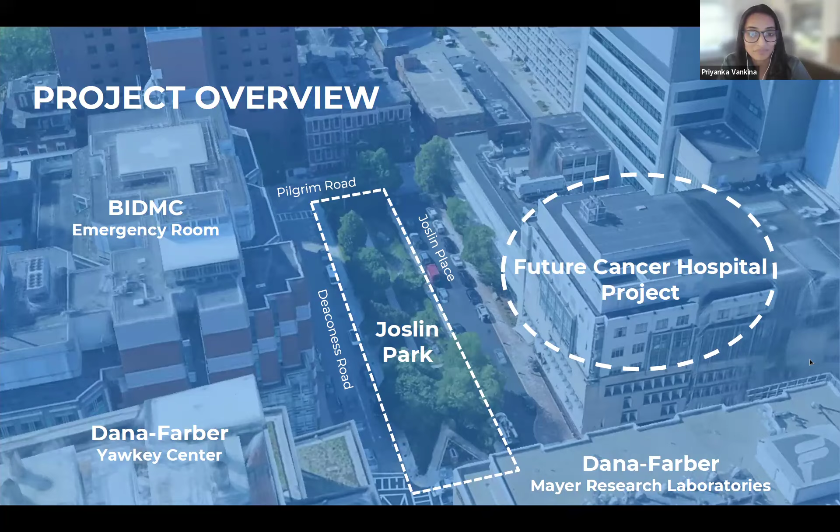Now we're done with the housekeeping, and we're going to get started on the project overview. We'll start with an introduction of the project team, then look at an overview of the project, including the schedule. MVVA will then speak about the final concept plan for Joslin Park and its impacts on existing trees. The presentation will be followed by a listening and discussion session where we invite you to share your feedback, and then we'll discuss next steps.

Once again, I'm Priyanka Vankina, the project manager from Boston Parks. Tonight we have Jill Zick, the chief landscape architect at Boston Parks. Also on the team is Seth Reisman, deputy director of design review from Boston Planning. The designer and landscape architect for this project is Michael Van Valkenburgh Associates. From MVVA, we have Chris and John tonight, who will be presenting the team's design work. Megan Bonner is your neighborhood contact from the Office of Neighborhood Services, and you are also welcome to reach out to her with any comments or questions. Finally, we have Michael McMillan, Parks Outreach Coordinator, who will be moderating the meeting tonight.

With that, I'll pass it on to Jill to discuss the project schedule and funding. Thanks, Priyanka. I'm Jill Zick, the interim chief landscape architect for the Boston Parks and Recreation Department. This is the 4th community meeting held for the Joslin Park project. The project has already completed 3 design meetings, and tonight we'll discuss the impacts of the final concept design on the existing park trees. For those of you who might be new to the project, I want to provide some further context on how we came to be here tonight.

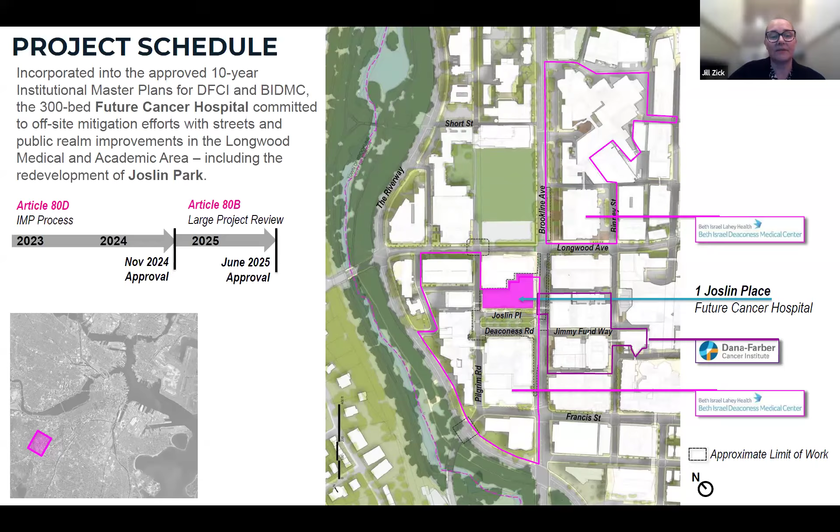The proposed development of the future cancer hospital on Joslin Place has presented us with a unique opportunity to renovate Joslin Park. There have been some interesting park issues that have come up through this lengthy design process, several of which we continue to explore to ensure the best possible park outcomes.

It's very unusual for us to begin a design process in one year and talk about constructing it five years later, which is what you're seeing suggested in this timeline. But the timing of the park design is tied to the advancement of the hospital project, so it is important for us to gather and incorporate timely community input as a part of the overall process.

Tonight's conversation will continue to inform the evolving design of the park, but the improvements will not be completed until about 2030, towards the end of the hospital's construction. It is also important to note that funding for the park improvement is coming from the Future Cancer Hospital project and not from the City of Boston Capital Improvement Fund.

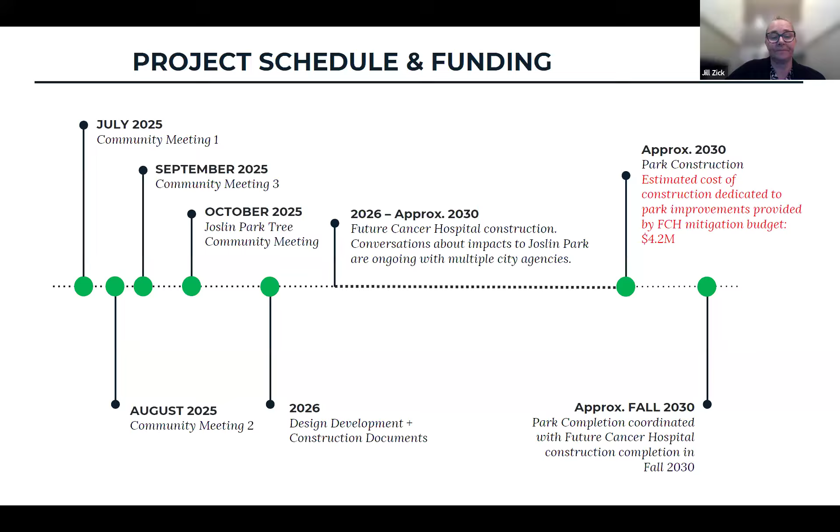Thank you, Jill. Thank you, Priyanka. Hi everyone, I'm Chris Donahue, principal at MVVA, the landscape architect, looking at this project as it relates to the Future Cancer Hospital. But really excited to be digging into Joslin Park proper, and what it means to look at the park and what could be a really fantastic public space for Boston, for the Longwood medical area.

We look at every project really as the first step is looking at the existing conditions. How can the existing context, the existing urban fabric, and the existing tree canopy support a new, accessible, inclusive, beautiful public space within the city? So looking today at opportunities to capitalize on existing tree canopy within Joslin Park and ways to reinvent the park, reinvigorate the vision for it around existing canopy, looking at several opportunities to do so with your input.

We began this process through some analyses that we presented as part of that public process that Jill spoke to a bit. Part of that analysis occurred in partnership with a licensed arborist in Massachusetts who went out and performed a catalog of the existing trees. They documented the species, the size, the form, condition, any notable structural risk, things that needed to be maintained or trees to be removed, things like that.

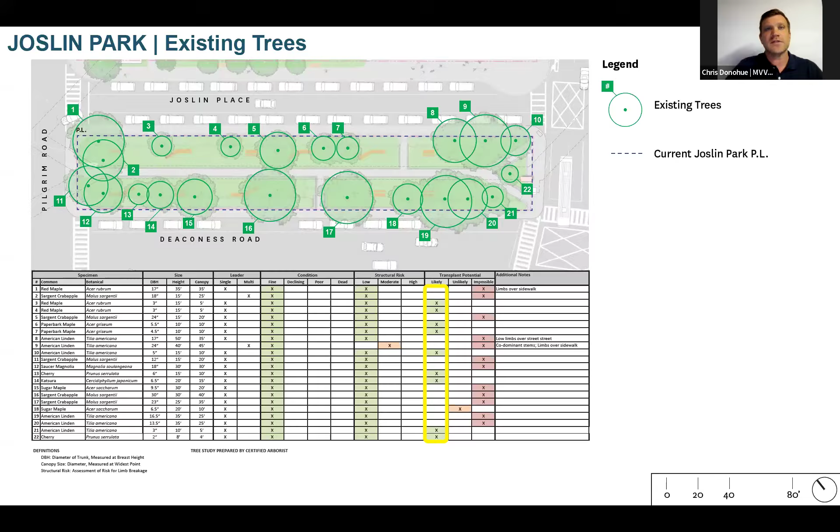And also whether any of those trees would be likely candidates for transplant, meaning could we take that tree out of the ground, move it to a new location, and would it likely survive? Of the 22 trees on site, they identified 9 trees as candidates for transplant. Those are shown here in yellow on this plan.

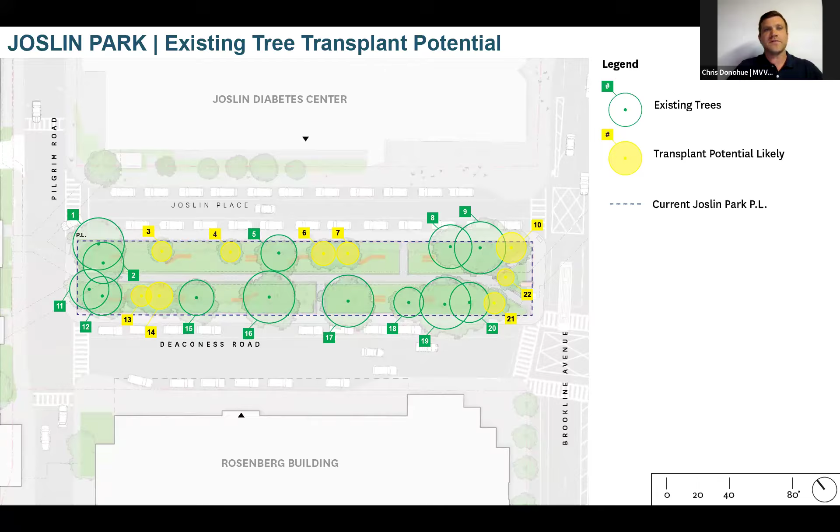All of them tend to be candidates because they're still of a smaller size, meaning they have a smaller root mass. It's more manageable to get in there with a large spade and dig those out as one contiguous root mass. That's the important part of moving a tree. There's lots of important parts, actually, but the most critical aspect is maintaining that soil mass, that root mass at the base of the tree, because that's really where trees get all of their nutrients from, is that root mass in the ground. Protecting that is an extremely important piece of the possibility for transplant. So the smaller they are, the more likely they are to transplant successfully.

Again, as Jill mentioned, we've been in a unique opportunity with this project. It's tied to mitigation, but it feels like such an incredible opportunity, right? To rethink the public realm as part of a new cancer hospital that's so desperately needed in the city. How can the public realm around it also support health and wellness of the city's residents? A vision for a park, as we've been encouraged to study with BPDA, with the Parks Department, and various city agencies, that makes for a more inclusive, accessible, verdant public realm is really exciting to me, selfishly, as a landscape architect, but also as a team looking at how this cancer hospital and the adjacent public realm can support a healthier city in the LMA and in the city more broadly.

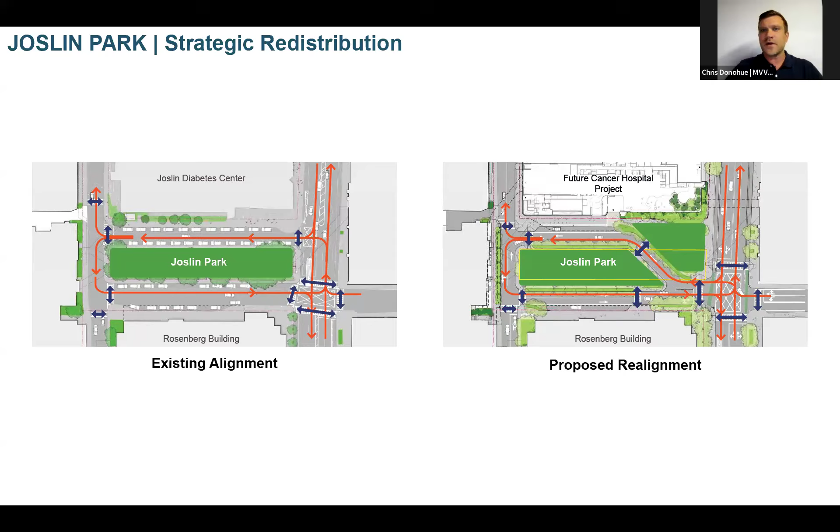I mention this because it's a really important part of how we think about protecting existing trees. This is a massive undertaking to realign the roadways, to realign the park boundaries, to establish new grades and establish new accessible routes through and to a park. It's a lot of work and a lot of disturbance. As I just said, disturbance around existing root mass is what causes potential failure if you were to try to keep a tree in place, but you weren't really careful around its existing roots. I mention this because it's highlighting the complexity in some of this and why we're making some of the decisions that we are, and looking into the opportunities that we are with this process that I wanted to look at tonight with you all.

The concept plan that we developed through that public process with the Parks Department and the community and BPDA and various city agencies is one of several garden rooms that negotiates quite a lot of grade change across a relatively small space. The space is about as long as a football field, so 100 yards or 300 feet, give or take, but it's about a third as wide.

If any of you were on previous meetings, you would have seen a diagram that we showed with the proportions and scale of this site. It's trying to get, across 10 feet of vertical change from the left side of the plan over here, down almost 10 feet lower on the right side along Brookline Ave.

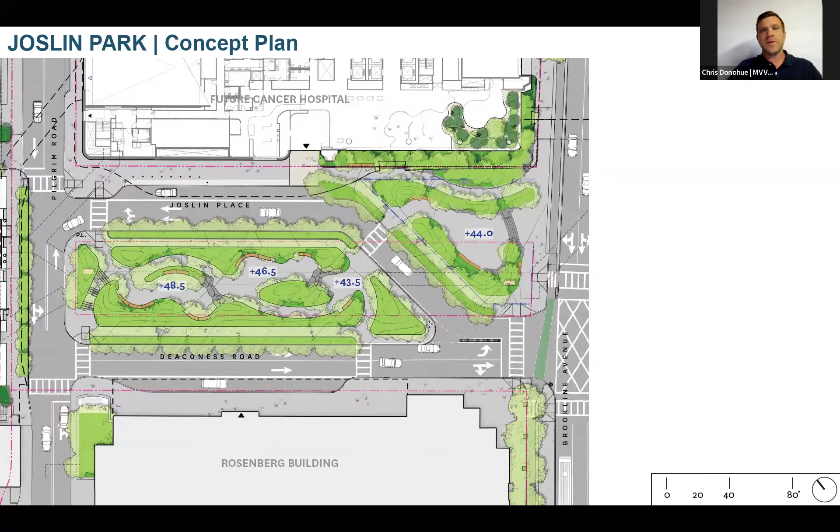And then between Joslin Place and Deaconess Road, it's also negotiating somewhere between 4.5 and 2.5 feet, from one side of the plan to the other. All of that's really important to consider when thinking about moving trees around or trying to maintain trees in their current situation, but moving a lot of the pieces of the park around them.

So we went through this initial exercise of mapping existing trees over that concept plan that we developed, and developed a list of, basically, trees to eliminate. Honestly, it was our first step of looking at what trees are simply not candidates for survival or for retention within this totally reorganized urban realm.

We looked specifically at the City of Boston's Critical Root Zone, or CRZ, which is defined as a 12-inch radius for each 1 inch of diameter in the tree at DBH, or diameter at breast height, 4.5 feet off the ground. So, for example, a 9-inch diameter tree will have a 9-foot radius critical root zone, or 18-foot diameter.

So these circles, these sort of pinkish-purplish circles—this is a very colorful diagram, I apologize to anyone with difficulty with color—those pink circles represent the critical root zone. And so we went through and started to analyze critical root zones that are simply too large, marked in orange.

That's tree number 5, 16, and 17. Their critical root zones are extremely broad, capture almost the entire site, and would make it almost impossible to weave in new accessible pathways, new accessible garden rooms, new benches—anything new, really, would be very difficult to accomplish within their critical root zone. So they become very difficult to maintain, if not impossible.

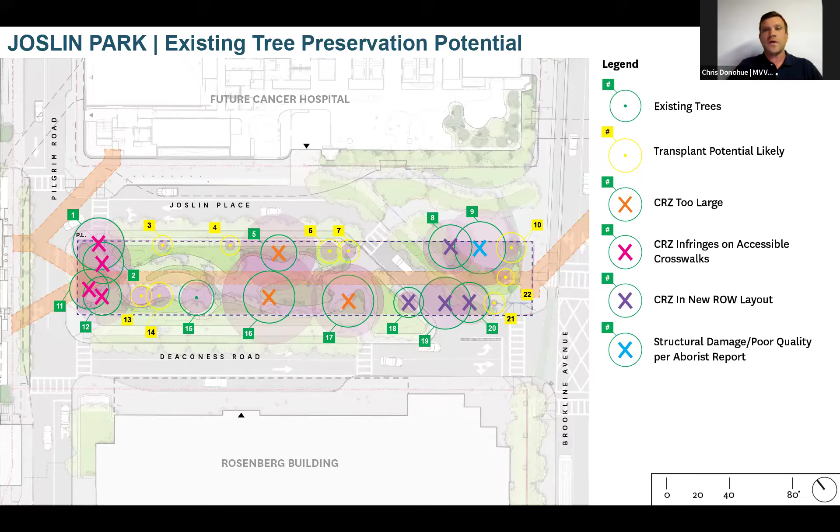Take a deep breath there for a second.

The other thing I wanted to acknowledge here with our process and this park—extremely narrow space, as I said, but quite complex as far as an urban park goes. And part of it is because of how narrow it is. As I said, it's negotiating nearly 10 feet of grade change. You can't really change much about the existing topography under a tree that's been in place for any given amount of time, so basically all the contours under an existing tree would need to remain as is.

Worth noting, this in orange is an existing below-grade tunnel that we've spoken about previously. There will have to be some repairs to that tunnel, some moving of existing utilities along the top of that tunnel, to support this new park alignment. All of this is part of that mitigation package. And then just noting the sort of mess of existing utilities.

This is very common in cities like Boston. There's quite a lot of complexity in the existing utility networks, especially true in a medical community where there's a lot of demand for different resources in these very complex buildings. There's a lot of existing complexity within a small site that informs how we think about what can be preserved, and where there are opportunities for relocation versus preservation. It's not just simply designing around trees in an open field, but it's something we're seriously embarking on as the next phase of design as we develop the vision for the park.

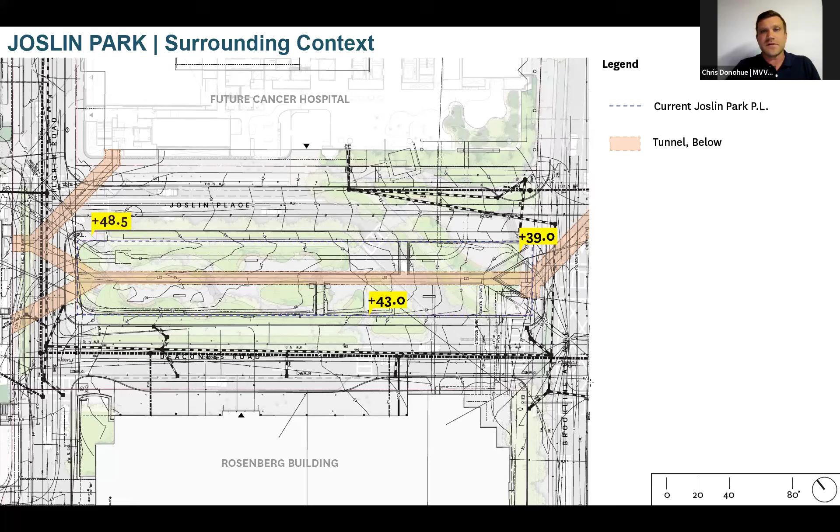We've identified several opportunities that may work well together as more than one, but we've pulled them out to look at separately given the different issues or complexities that come with them.

Opportunity A: tree number 15 is a 9.5-inch DBH sugar maple. It's the largest tree by DBH standard still deemed possible to salvage based on the diagram shown earlier. It's also a qualitative choice—myself and others on our team at MVVA, having been on site together quite a lot, all noticed this tree and thought it would be a really good candidate to save, given the quality of the specimen and the canopy it provides in the city. So we're looking seriously at how to reorganize the plan to allow that tree to remain in place.

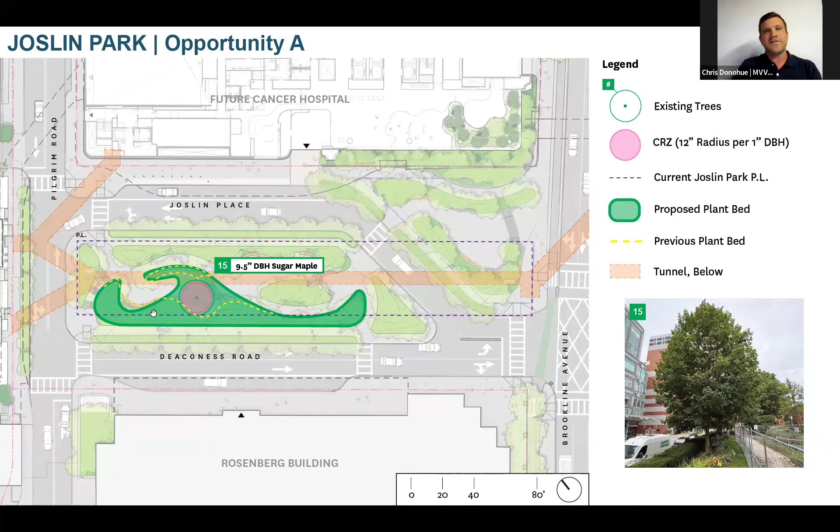This diagram shows where that tree sits in the final vision we developed through the concept design process. We're now looking at how to modify that vision to retain these trees. In that same location, we'd have to maintain a plant bed around it rather than the paved garden room we were suggesting there. This dark green shape shows how that plant bed might be reorganized to absorb the critical root zone of the tree so it could remain at its current elevation in its current spot. We would deconstruct areas of the park around it and rebuild a new park around that tree so it remains in place.

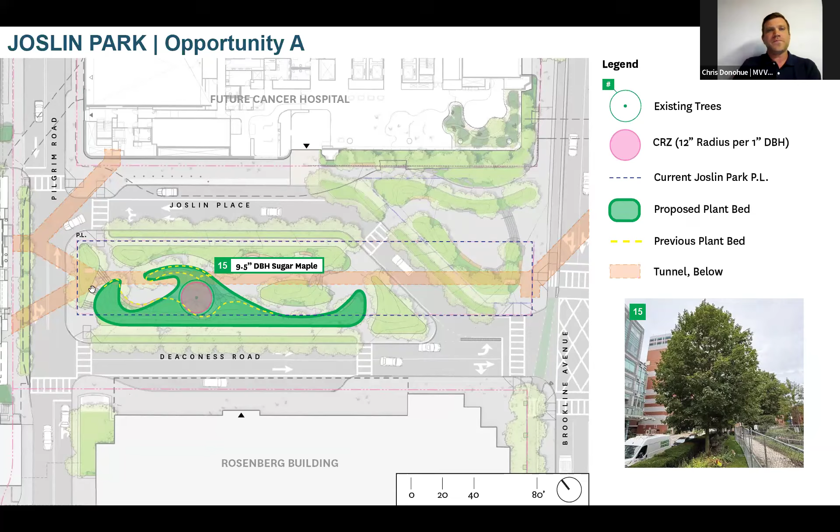The net change there is approximately 750 square feet of modification to that final vision plan. That change can be read as a net add in planting area—an additional 750 square feet of soft area within the park, which we think of as tree canopy, shrubs, perennials, things that are soft and beautiful on the ground plane.

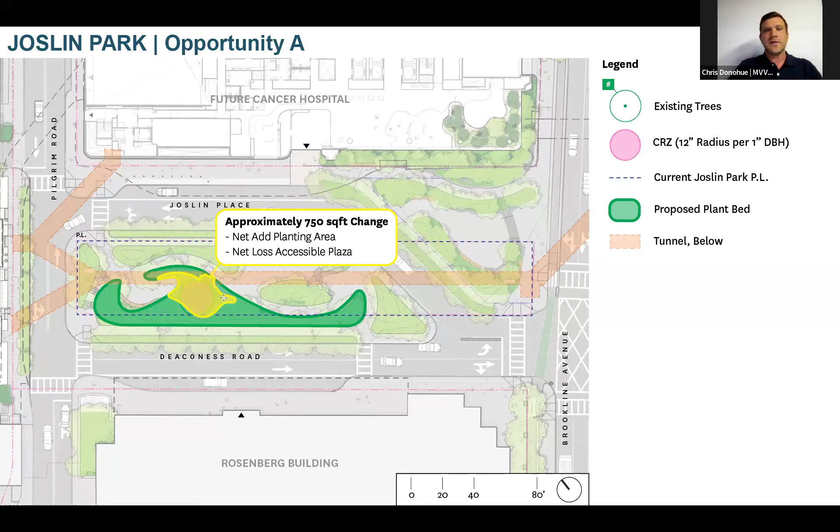But the really key charge here is making a more verdant public space, while also making one that's much more accessible and inclusive, allowing for gatherings and people of all walks of life to come together in a place that offers respite in the city. So there is a bit of a loss in net accessible plaza space compared to what was shown previously, if we maintain this tree. That doesn't discount it as an opportunity, but we're trying to track where we were previously, because it is a public process—we want everyone on board with the decisions we're making collectively.

Opportunity B looks at it from a different perspective: how we might capitalize on the opportunity to transplant trees—those smaller ones we showed in yellow. The nice thing about this idea is that it starts to create the vision for the park that we eventually want to see in 2030.

This park currently has a line of trees on either side. We envision it more as a miniature forest, or pockets and corridors of miniature forests—patches with quite a lot of transparency, so you can see through and underneath them, but they provide a really robust and diverse urban canopy. It's a mix of different species clumped closely together, creating garden rooms and nice density, places for migratory birds to land, adding an entirely new quality to a public space in the city.

So the idea was taking those, I think there were 9 trees identified as candidates for transplants, taking 4 or 5 of them and lumping them together to start that idea of a miniature forest as a sign of what's to come when this park is realized. That's another really exciting opportunity we're looking at folding in. In this example of these 5 particular trees we identified, it saves a total of 18 inches DBH amongst those 5 trees.

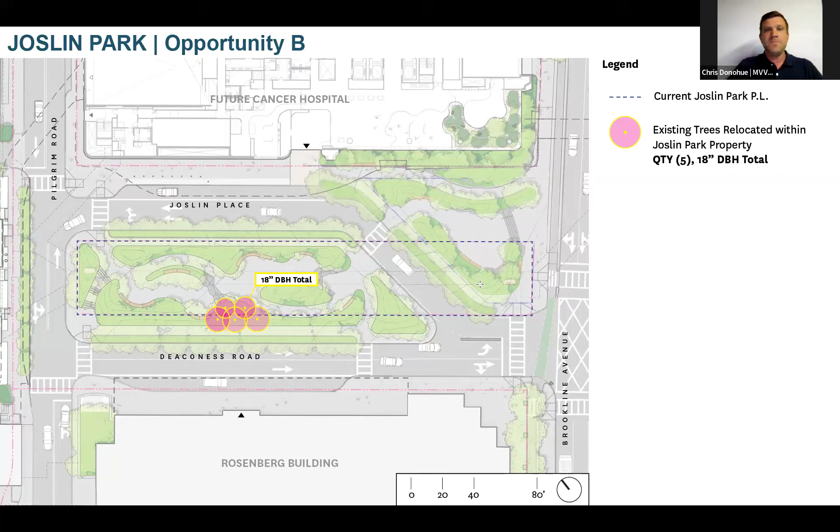So that's nearly double what that one existing sugar maple would save if we were to retain it in place. I think it's also really great to maintain that much canopy, even though it's moved from somewhere else on site, still within the boundary of that same park and used to those same general conditions.

And then opportunity C goes back to a concept that maintains trees in their existing locations. Tree number 13 is a 6-inch DBH cherry tree, and tree number 14 is a 6.5-inch DBH Katsura. Katsuras happen to be one of my favorites, so I'd love to see that tree or other versions of it in the park—they have really beautiful structure and bark, and unique leaves too. We use lots of them as multi-stems in other landscapes of ours here in Boston and around.

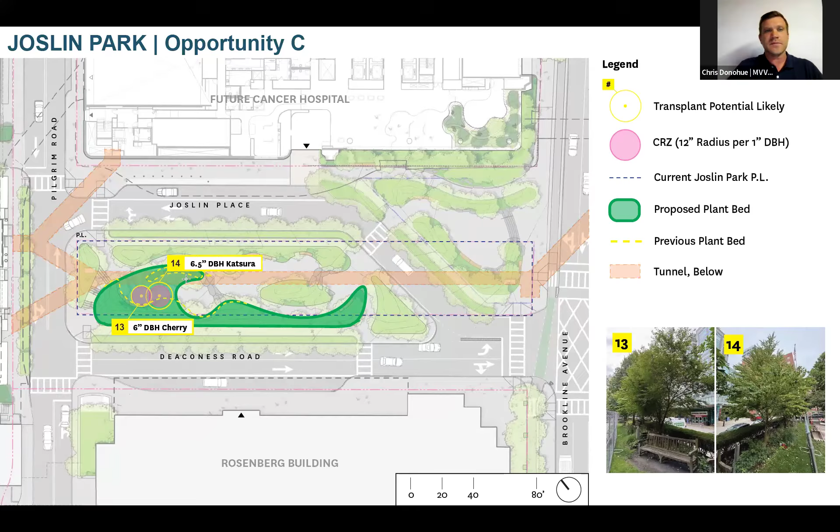So I don't know that it's ideal, but we want to keep our options open as these opportunities develop, as we move through the design and start to encounter the nitty-gritty things we'll discover as more of our engineering team comes on board to talk through mechanical, electrical, and how we deal with ventilating that tunnel below. All of these are pretty serious challenges that'll fold into a relatively small park footprint. So we want to keep our options open and look at all of these opportunities holistically, and have some options as this thing develops.

So the kinds of trees that can deal with a little bit of salt, the wear and tear of air quality in an urban environment, and the kind of shade we see in this park currently. We're thinking about all of that as we develop that palette, and we'll continue to develop it as we move into further phases of design. The summary here—I'll go through it one by one.

In option A, or opportunity A, as we were describing, preserving that existing sugar maple would mean preserving 9.5 inches DBH of existing canopy in place.

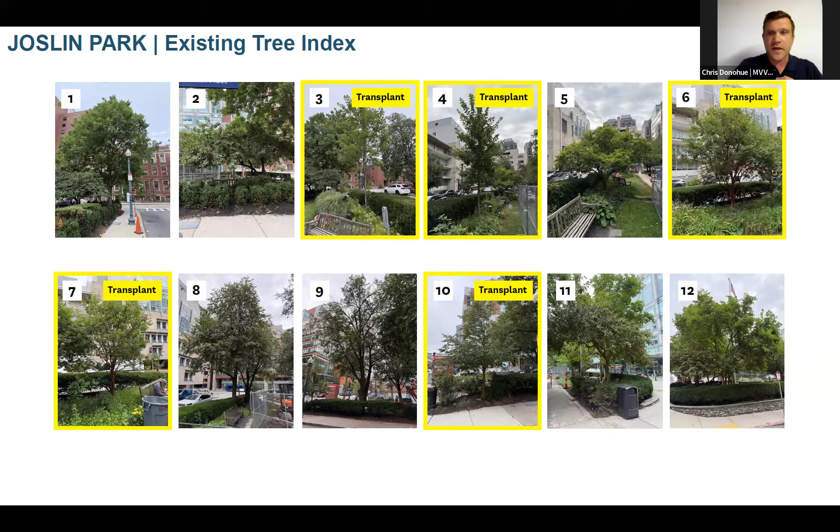We've also included, before passing it back to the parks team, a quick catalog of all the existing trees so we can look more closely at all the candidates for transplant. A handful of paperbark maples in there, other really nice small trees. There's an amelanchier in here somewhere that was a good tree as well. That Katsura up there on number 14. And number 15 would be that sugar maple that we would potentially preserve with option or opportunity A. All these are very much on the table and will continue to develop, but we wanted to present each and every tree as a candidate in whatever possible way it could be.

I'll pass it back to you, Jill and Priyanka, to facilitate any questions or dialogue, but thank you all for your time again.

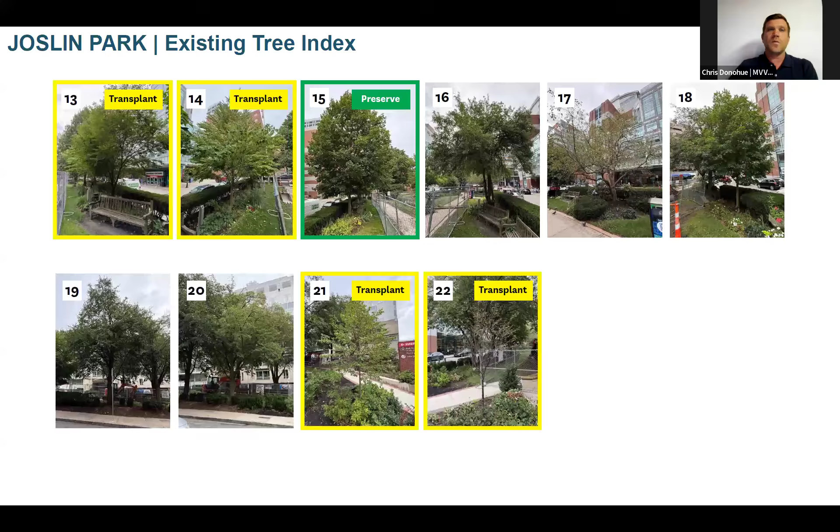Sure, I can start with the next steps on the design, and then Priyanka can help talk about next steps with the community. We will begin to dig into this plan, or a version of this plan, with our engineering team. We are just at the threshold now between concept and more detailed schematic design development and documentation phases, where all of the engineering will come on board in a more serious capacity, and we'll start to unpack all of those utility networks. That's where the feasibility of some of these opportunities will really come into play.

It will be priority one that we make these opportunities work as feasible as they may be. We will then document ways that there's also a structure or strategy in place with the contracting team that will be part of the specifications around what's required to protect these trees. So there will be parameters in place—it's not just build the park around the trees. There has to be protection in place around them through construction of the hospital and of the park. We'll also be on site to help specify what those protective measures look like.

In terms of how this is then shared, the final vision, when we get closer to detailed documentation, I don't know exactly what the Parks Department's typical process is, but I would be happy to share that final design again through a similar venue or however makes the most sense for parks.

Sure, yeah, we have a couple of options. This is ideally the last community engagement as the team goes into the design development of these drawings. We've had three meetings leading up to this, going through the community process to get a final concept plan, and this meeting is really just talking about the trees. As Chris said, they will then go into design development, really massaging out exactly what can be saved—and it may be these trees.